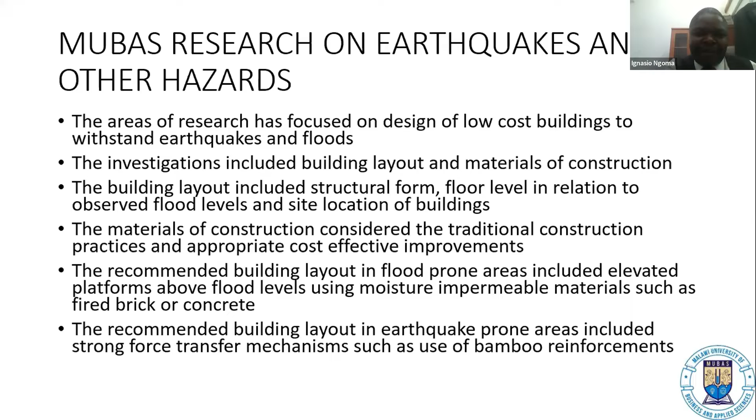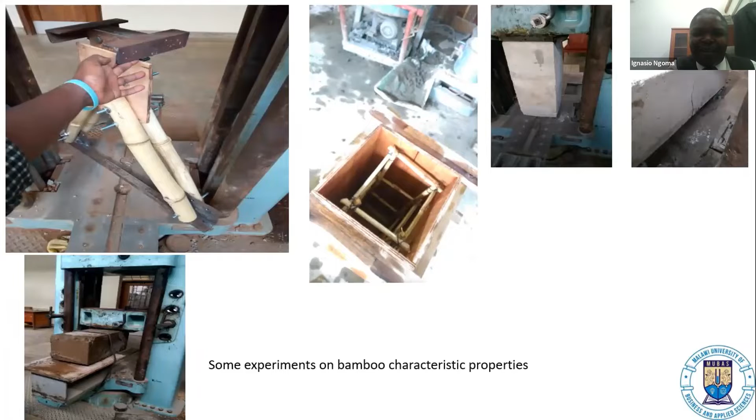And so we see again connections. We had that demonstration truss construction as part of our work, using plywood as a mechanism to look at the connectivity that we can have. But definitely bamboo, looking at the deforestation that has taken place, and given that bamboo can be harvested within 3-4 years, is a potential material for construction. Okay, next slide.

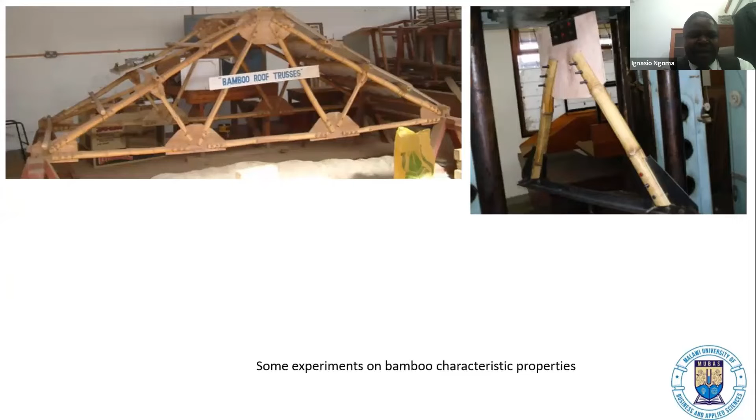Okay, so with the University of Bristol, we have had research starting from 2017 up to now, and we have looked at a number of areas, including the construction of residential houses. The pictures we saw with Joe were looking at the construction of residential houses. Now, the focus is on school buildings. With the school buildings, we have two areas we are looking at: the communities themselves, how resilient they are, and the actual structural typologies, how the buildings can stand forces.

And so basically, for community resilience, Innocent will talk about the other aspect, which is the building typologies or school typologies. But from the community resilience side, when we went to a school, we were able to target the head teacher, 2 teachers, 2 school management committee members, 5 learners, and 5 parents. In most schools, we were able to get all those, but secondary schools, as we know, are boarding, so we would sometimes not get the parents, but would get the other stakeholders.

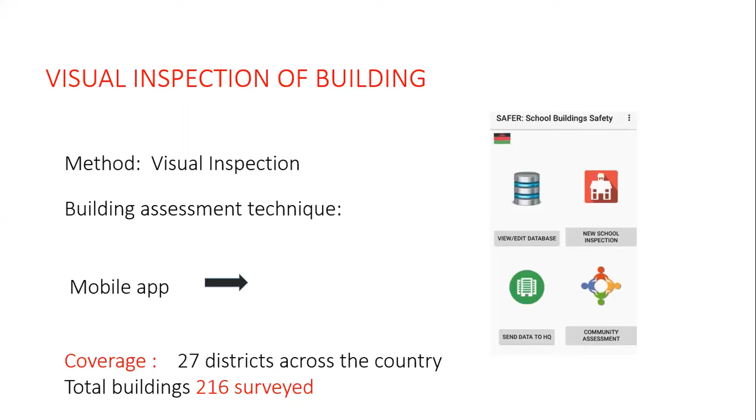Yes, so the method that was adopted was visual inspection, and the technique we used was the mobile app, and this is the interface of the mobile app that we used to carry out this particular campaign. So we managed to cover the whole country. I should say 27 districts, because we have 28 districts in Malawi. We managed to cover 27 districts, and the total buildings that we were able to get the details of were 216. Next slide.

Okay, so the actual building assessment involved getting information about the school. That is the name, identification, student number. And we were also collecting technical data to do with the building characteristics, for example, number of stories, floor area, structural system, whether reinforced or unreinforced, the type of material, and also retrofitting mechanisms on the structures.

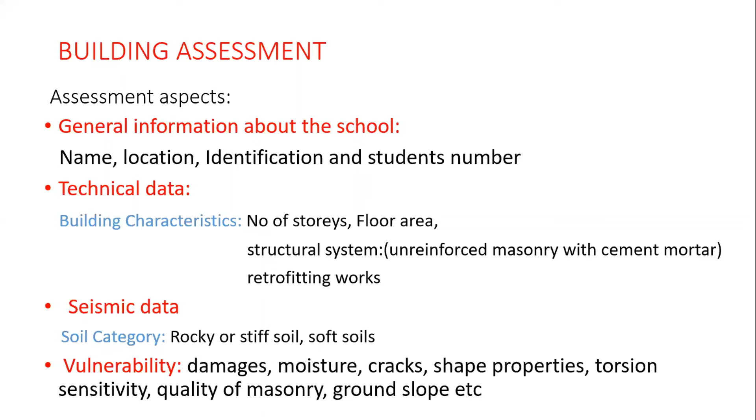Besides that, we were collecting seismic data. For example, soil category, whether it's rocky, stiff, or soft soils, and also vulnerability details to do with the existing damages on the structure, whether there is moisture ingress in the wall, cracks, the shape, whether the structure is torsionally sensitive, and also the quality of masonry as well as the ground slope. Next.

Okay, so these are some of the buildings that we were able to get the details of, and some of the observations included cracks on the walls. Some buildings had piers and link beams. Others were in a bad shape without any connections. So these are some of the typologies of the buildings that we were able to get details of. Next slide.

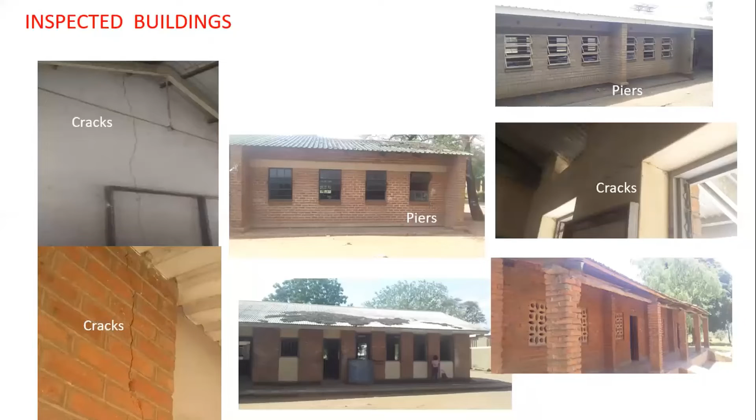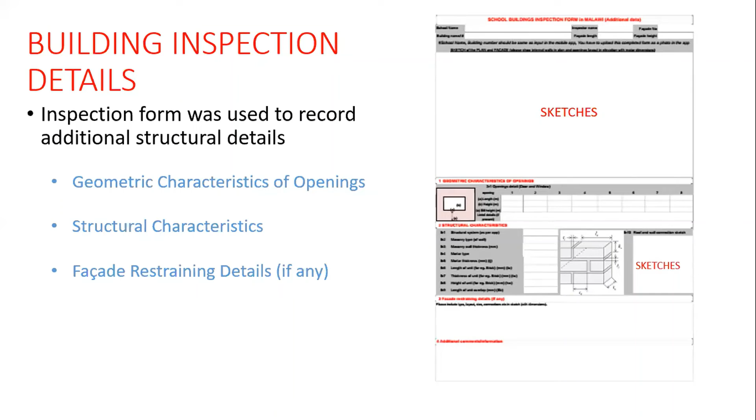Okay, so having collected data to do with the seismicity, vulnerability, and also the technical, we were getting additional structural details to do with the geometric characteristics, for example, openings, structural characteristics, and also facade restraining details. So we were recording the information on these aspects on the form, which is shown on the screen. And then we were also able to sketch some details that were deemed necessary to inform the modeling. Next slide.

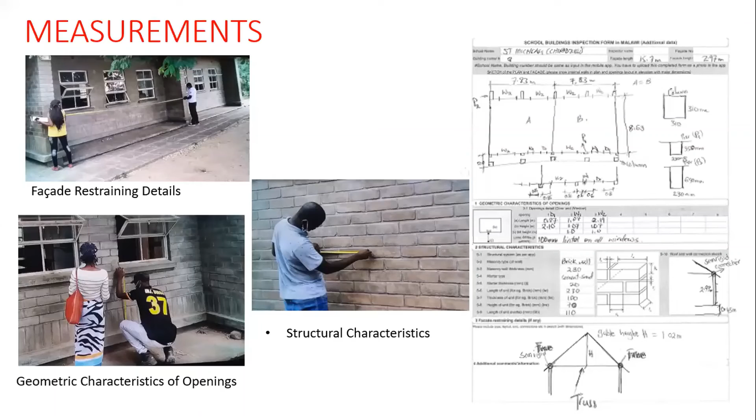Okay, in terms of the measurements, for example, facade restraining details on the first picture, we were able to get details of the pier parameters, the length, the width, etc. On the geometric characteristics, we were looking at the dimensions of the openings, for example, windows, the height of the sill, and also the height of the foundation. On the structural characteristics, we were looking at the size of building units. For example, if it's a brick, the dimensions of the bricks, and also the overlapping of the bricks. And that information was recorded on the structural survey form. Next.